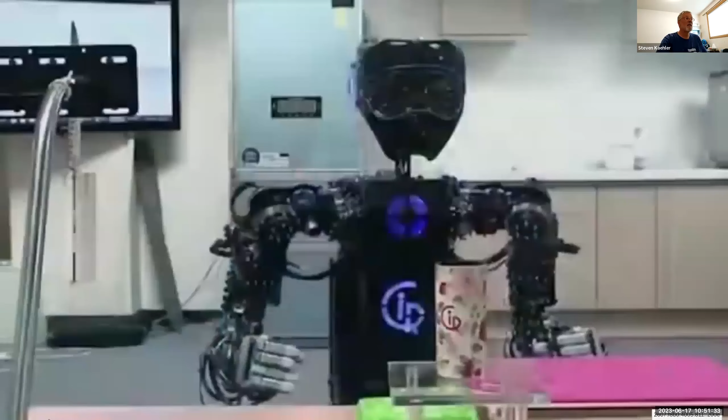Robots are getting pretty sophisticated these days. They can swim, chop, even lift weights, but moving over rough surfaces or unstable terrain still seems to be something most robots cannot do. But it's something animals can do really easily, which is what inspired Daniel Goldman. He's created a robot that, as you can see here, can do what should be impossible.

So, Daniel, how did you get your robot to move so well in the sand? Well, this is a robot we created to act as a physical model of some of the organisms we study - in particular, a long-legged, long-toed little lizard that runs around in the desert southwest of the United States. In this study, we're focused on how we can predict and understand why certain leg shapes work well when the robot tries to move across sand, and how some don't allow it to move well at all.

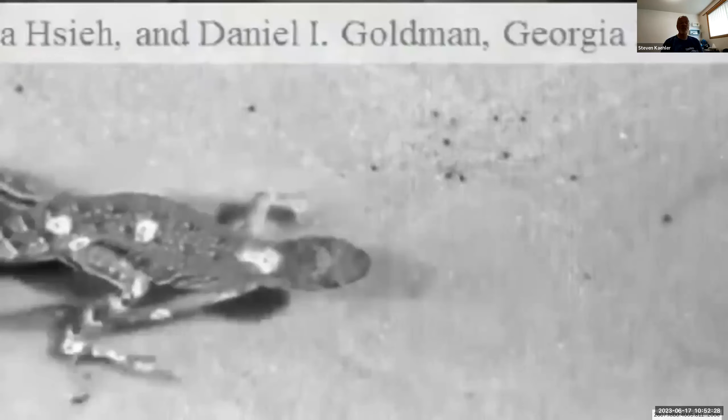I'm looking at your robot's legs, though - they don't look too much like lizard legs. They look sort of like concave C shapes. How did you come up with that shape? Right, we don't necessarily want to mimic the lizard's leg shape. In this study, we're really interested in discovering the principles by which different shaped limbs allow robots to move, and one day try to apply that to the principles that allow animals to move.

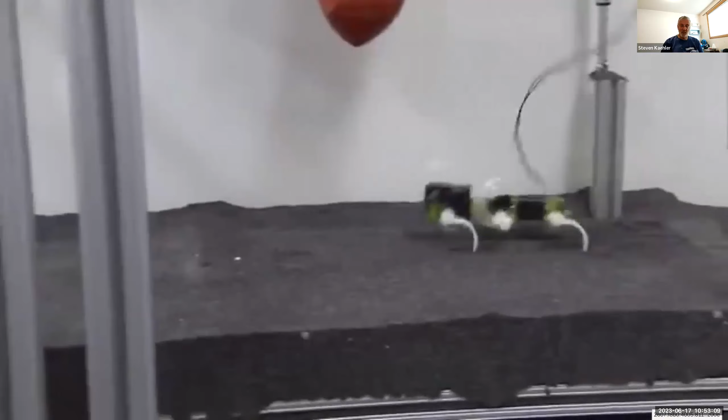So what about your robot is inspired by lizards then? Very little of our robot is inspired by lizards, other than the fact that the robot's legs move in a cyclical manner and interact with a granular material. We think of the robot as a model of any organism, which allows us to get at the principles of limb-ground interaction when that ground is a granular material that can flow and solidify underneath footsteps.

But surely those lizards are better on the sand than I would be. Is there something about the way those lizards compare to other animals that inspired you? Well, in fact, the lizards we have studied are champions of desert locomotion. They can go over hard ground using their long toes, and they can go over very soft sand. So inspired by their performance, we want to understand why the particular limb and feet shape are so good. But to do that, we had to take several steps back to really understand the general principles by which complex shapes interact with ground like granular material.

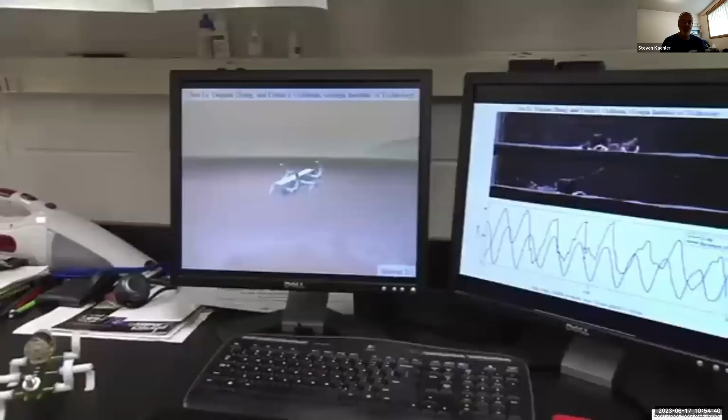So how does your robot compare to, say, a tank with its treads or the Mars rover with its wheels? Is it better? Well, it's hard to say. In terms of numbers of body lengths per second it can move, I'd say it's quite impressive, but at this point it's hard to make a direct comparison. We hope with our new terradynamics, the theory and models that allow us to compute the performance of different devices including wheels and leg devices, we can get some systematic understanding and comparison of these different modes of locomotion.

So Dan, this is a pretty exciting piece of technology, because the whole world isn't paved and other planets aren't paved. How do you see this being applied? Are the next Mars rovers going to have little funny curved legs? Well, you'll have to ask NASA about that, but we think that using our terradynamics, our system to understand forces on arbitrarily shaped intruders, can help designers create effective limbs for different varieties of granular material.

Well, thanks so much for talking to us, Dan. My pleasure. Thank you very much.

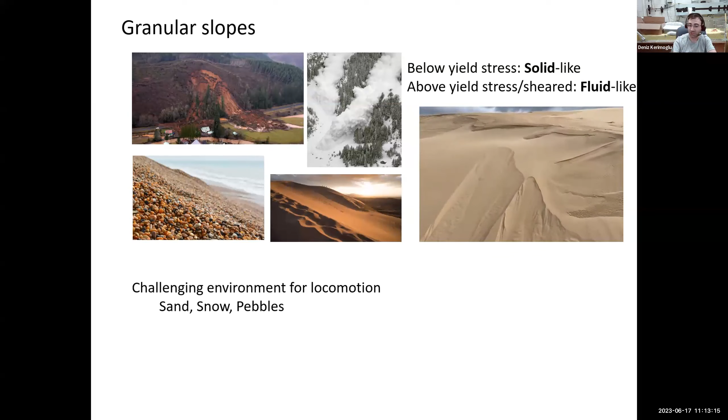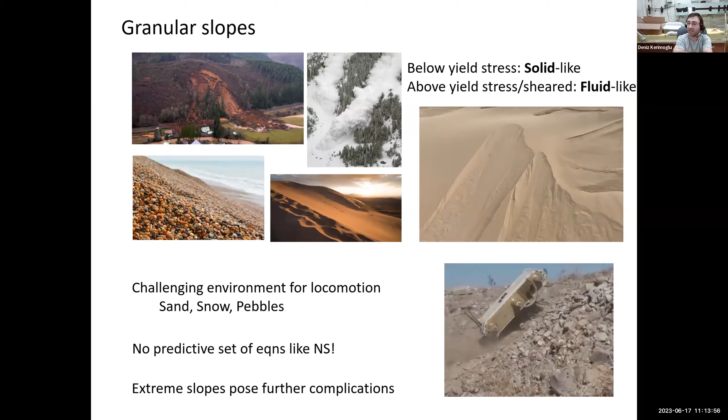It's really due to this multi-phase feature of such media being solid or fluid-like, depending on the force you apply, that it's so challenging to locomote on such media. In addition, especially on extreme slopes like sand dunes, even small disturbances can generate avalanching downhill flow and other complex behavior, which poses further complications. Unfortunately, there is no predictive set of equations like Navier-Stokes for fluids or hard contact models for rigid surfaces, so there's very limited things you can do if you want your robot to conquer this unfriendly landscape.

The approach we are pursuing is called robophysics. I believe there are lots of engineers listening, and this is a bit different from a regular engineering approach, where engineers optimize for a specific goal given a motivation. Here, we actually do not want to optimize for whatever cost function we have. We want our system to fail frequently so that we can learn from the failures a lot.

This approach is called robophysics. You want to understand the interaction physics of the robot limbs and body, and intruding bodies into these complex media, which is granular media. So we systematically span and investigate variables instead of trying to optimize them. As Dan's lab has shown over the years, successful robotic and biological locomotors actually modulate their gait behavior to tap into this multi-phase feature, the solid and fluid-like response in flowable substrates. This means the locomotor is coupled to its environment—they're not independent entities, they're more like a merged entity.

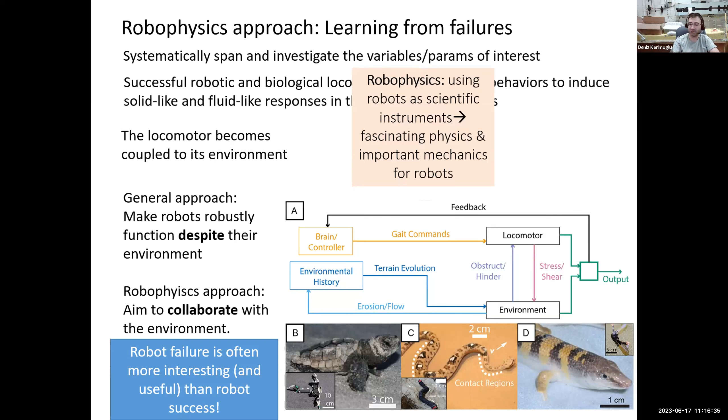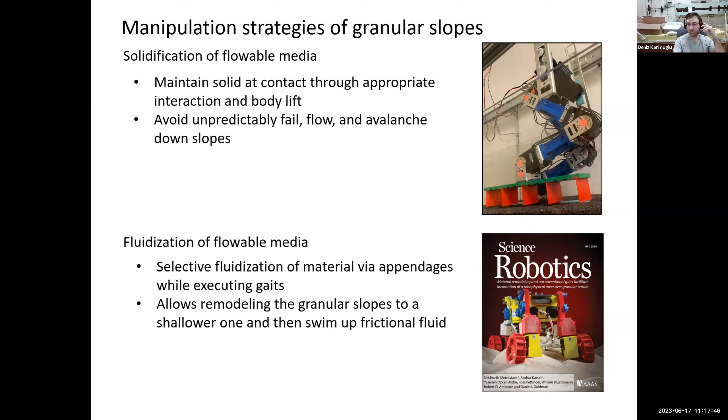I already mentioned two distinct features of granular media, and to tackle that issue, our lab has developed two distinct approaches over the years. First, solidification of such media on slopes—the idea is to maintain solid contact through appropriate interaction and body lift, avoiding avalanching behaviors by engaging with the terrain appropriately. The other approach is to fluidize the flowable media, as you see with this small rover our lab has been working on for about 5-6 years, tapping into the fluidization aspect of the material to create selective fluidization via appendages using unconventional gaits. I was talking about the first approach, but if I have more time, I can also pitch the second approach.

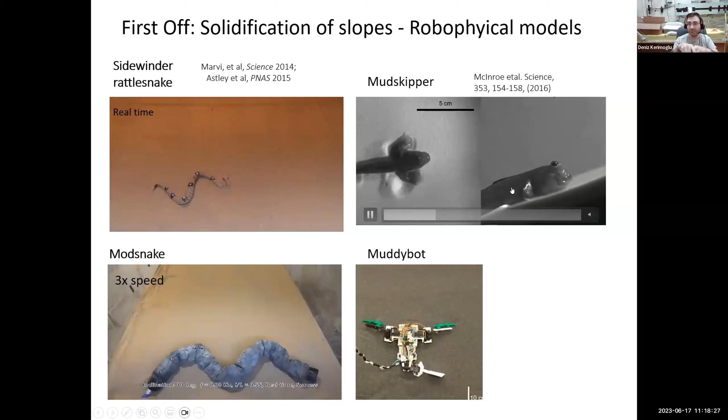Let's start with the solidification of granular slopes. Again, I was talking about a robophysics model—you see a snake-like robot climbing up a granular slope here. Our lab, about a decade ago, developed a similar robophysics model which isn't a perfect robot, but is good enough to mimic the basic fundamental gaits and complexities of an actual snake. By having a large contact area as a function of slope angle, this robot was able to locomote up to about 20 degrees.

Another study was done on this tail guy here, the mudskipper, investigating the effect of fins and their insertion depth, as well as the effect of the tail as it interacted with the granular media as a function of slope angle. The main idea is to try not to make a mess of the ground, so that the response is as solid as it gets—to get the most solid response out of that flowable slope surface.

This is the actual solidification approach. As you see, the sidewinding snake robot increases its contact area when ascending those sandy slopes to stay below the sand's yielding stress.

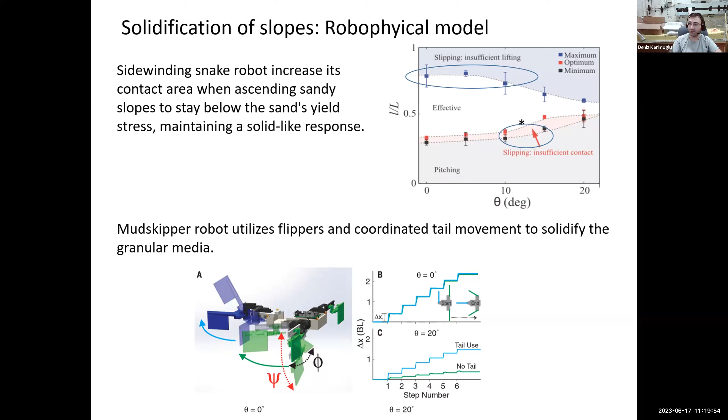So that allows it to generate a more solid-like response. For the mud skipper, it utilizes its flippers and fins and coordinates tail movement to solidify the granular media and then propel its body upwards. So this is all just on the actual solidification process.

However, as I mentioned, these robots were only able to handle about 20 degrees of slope and only uphill, and they have limited limb utilization in that their bodies are in contact with the media most of the time. Even though they're trying to solidify it, they were not actually able to do it very properly. So we were asking this question: can we find a better, alternative way of facilitating limbs for slope solidification to ascend and descend the robot?

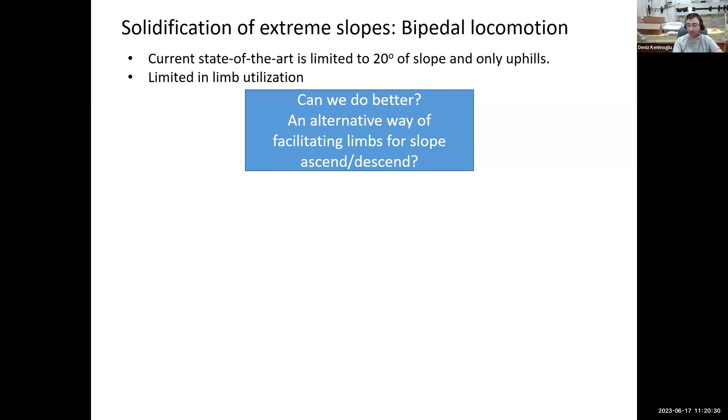So we were after this question, and then we just switched. I inherited a robot which was in the lab before, and it was a bipedal robot. Why a bipedal robot? Basically, the idea is that it's very constrained and can be easily unstable, but it could also be so useful in these very constrained environments where you can do exploration, search and rescue, as well as construction. Since it's also very close to human morphology and anatomy, it's a good platform to work with humans.

Now lately, with Boston Dynamics and a bunch of other researchers, the robots are becoming more and more dynamic while walking. There are a bunch of great studies out there. As a comparison: the static case has stability over speed and agility, whereas the dynamic case has speed and agility, but their stability is not that great.

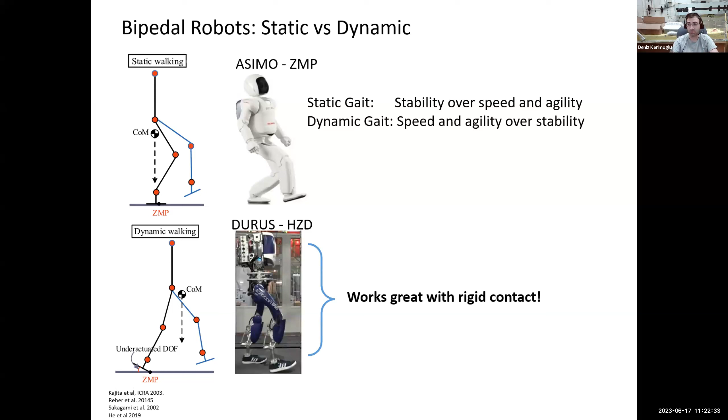So as I told you, dynamic walking is great. However, it's all good with rigid contact, where you know the reaction forces quite well and can predict them under some assumptions. But the issue is that on these flowable slopes, high-speed ground contact with the media leads to instant fluidization of the media. Instead of being more solid, high-speed contact makes them more fluid, and the terrain cannot generate enough response, so sinking, slipping, and tilting is the generic behavior you see if your robot is too fast on such media.

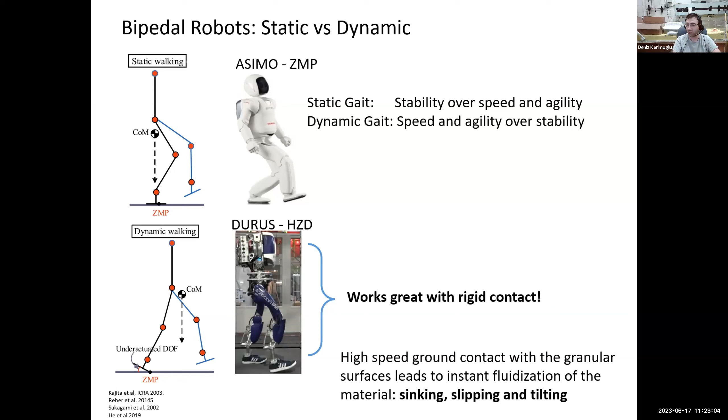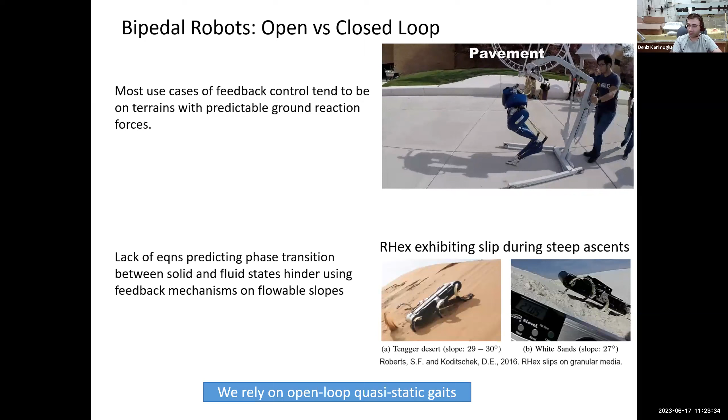Also, most of these robots nowadays have lots of sensors embedded and just use feedback control methods. However, again, the assumption is that the ground reaction forces are predictable to a certain degree. Since the equations are lacking, or very rudimentary, in such environments, the phase transition between solid and fluid actually hinders using feedback mechanisms on flowable slopes.

So based on this brief literature review, we rely on open loop gaits and quasi-static gaits to make the robot walk on these extreme granular slopes. These are the basic reasons.

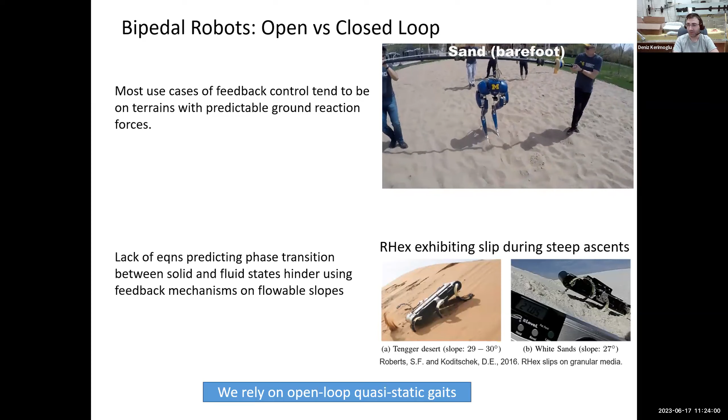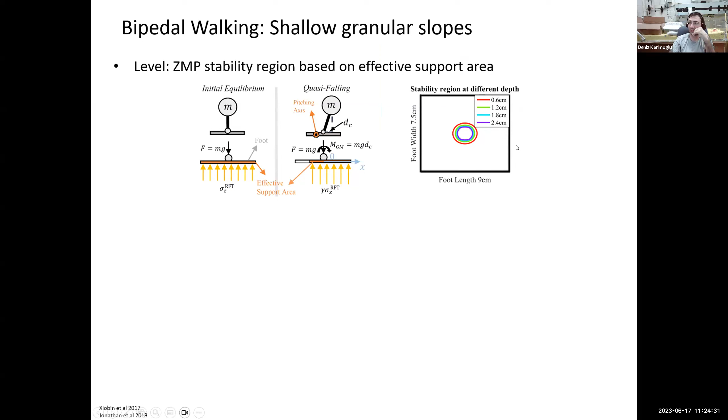Previously, our lab members worked on various ways to understand what happens on granular media. For example, if you're on a rigid surface with a foot of this rectangular dimension, the ground reaction force is effective all around this rectangle. However, when you switch to granular media, even on a level surface without any slope at all, you have a very limited range of stability.

And what we do is we just connect those servos using 3D printed links.

And we use poppy seeds basically to model these sand-like surfaces, because it's a good analog to model those sandy particles. We cannot directly use sand particles, because once they get into your actuator, it just blows your actuator. But these poppy seeds, if they end up in your actuator, they basically grind up to oil. Basically, they don't harm your actuator. This is the basic reason we use poppy seeds in our lab.

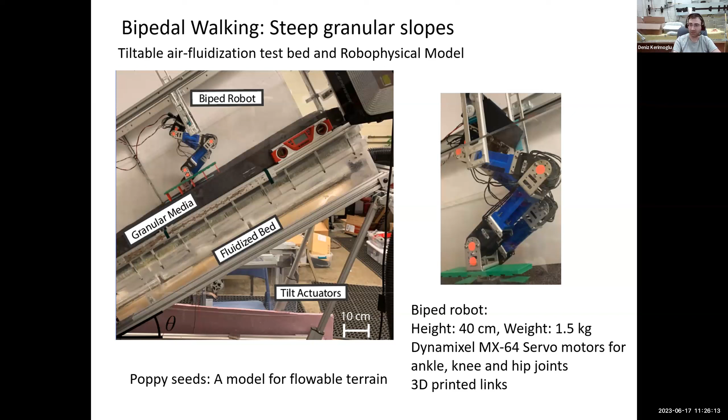And we just put this robot on a fluidized testbed to do parameter sweeps, basically, which is a robophysical approach that I was talking about.

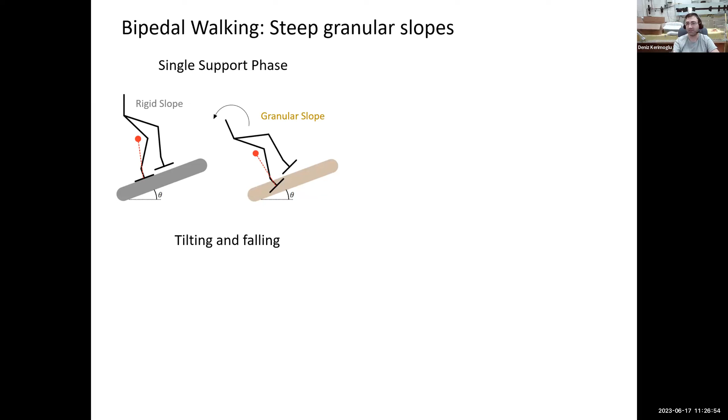A bit of an issue that I had while trying to learn using that robophysical approach was this: the center of mass, on a rigid slope, you can predict that, give or take, for a single step. But on a granular slope, since you kind of yield unpredictably, it's really tricky to determine your center of mass position, especially as the slope gets to extreme levels. It's almost impossible to determine the center of mass, so you cannot really design a gait, because you just tilt all the time continuously.

The next issue is, even if you can assume and generate a step on a rigid surface, that's okay. But on a granular surface, if you cannot determine your center of mass properly, you shove your foot into the granular media, and that generates a lot of reaction forces, which again leads to tilting and falling behavior.

So then I designed a gait structure which actually allowed me to keep the center of mass regardless of the terrain slope, right at the vertical projection of the ankle, so that regardless of the slope I'm walking on, I'm not tilting forward or backward. No matter what I do, I use the zero moment point - I alternate the zero moment point such that I don't even tilt a degree at all. And then after I place my foot successfully, I can then propel my body at the double support phase. Because I now have 2 contacts, I become even more stable.

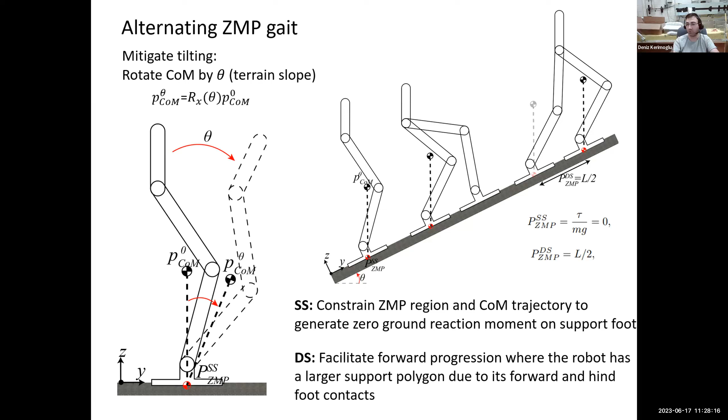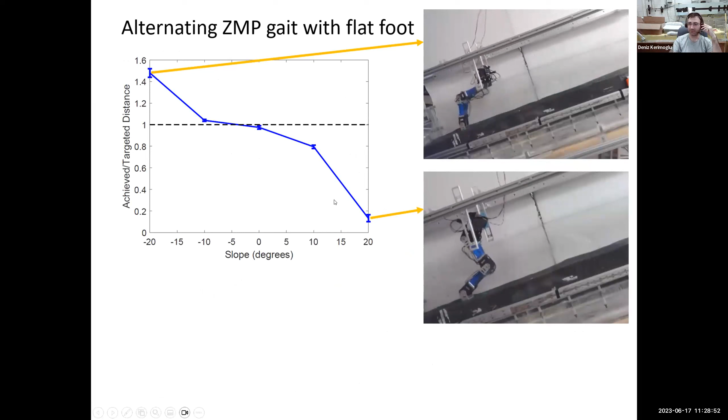But no matter what I do with this kind of gait that I developed, I keep slipping down all the time because of gravity. The friction between the 3D printed flat foot and the granular media, basically poppy seeds, allows you to stay straight up to 20 degrees. Other than that, no matter what you do, for steeper slopes, you just slide down. So that was an issue.

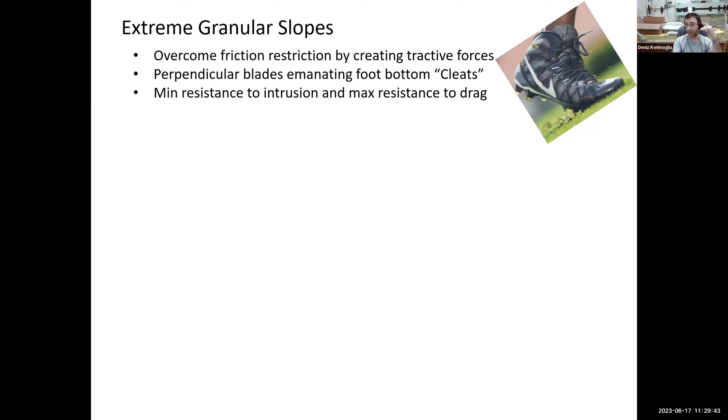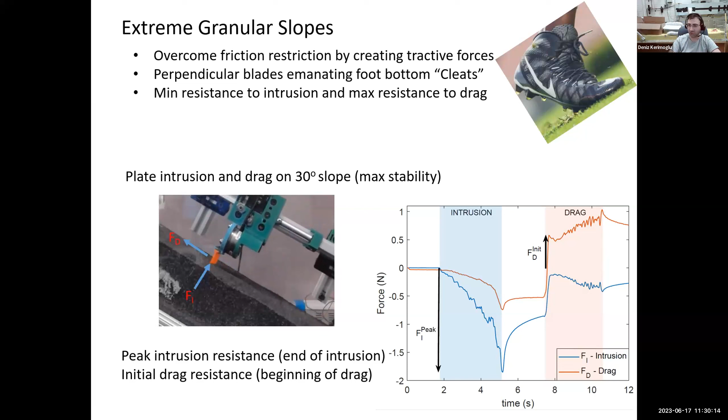So then turning back to soccer, if you remember these cleats for soccer shoes, we are actually inspired by these sharp objects or sharp structures that engage with the terrain while walking. We were asking the question: can we use similar structures to engage with the media so that we don't just slide down? So we first took a bunch of plates and inserted them into the granular media and measured the reaction forces, first intrusion resistance, as well as drag, at a very extreme slope of 30 degrees. And then we analyzed this data by changing the spacing between these plates. There is a specific design of these sharp cleats, sharp plates for soccer shoes. We wanted to understand what is a good spacing for our robots that will allow us to climb in a better way. That was the primary question we had.

So we can skip this one. We just 3D printed a bunch of plates with different spacing, starting with a single plate with 0 spacing, and then 1, 2, 3, 4, until 5 centimeters spaced plates, and then we intruded and dragged them. So to sum up: if I can generate lots of traction force, lots of drag force, with less intrusion resistance, I can place my plates properly without creating a mess, just solidifying each footstep during foot contact, so that I don't yield.

The robot actually does not slide down, that was the basic idea. We found that after approximately 4 or 5 centimeters of space between plates, we were able to create really good cleats, if you will. So we just placed them - this is a 4 centimeter apart spaced cleats, as you see.

Now, not only can I walk better on slopes from -20 to +20, I can now even walk at very extreme slopes, like 30 degrees. And the performance is not that bad - I fail like 40%, but I can make my way 60% for these kind of extreme terrains.

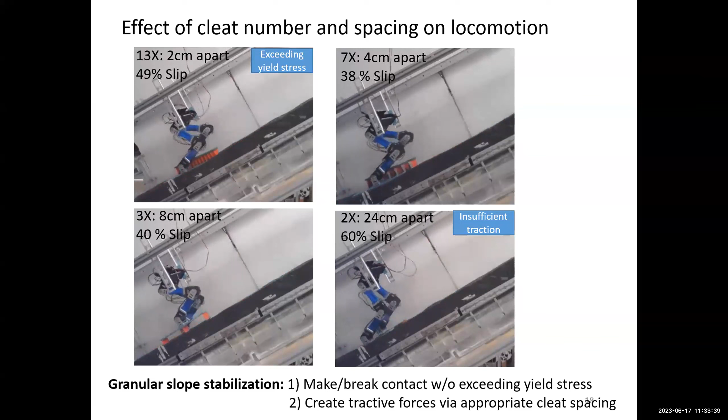I was wondering if you had tried curved plates. I did try various shapes, I would say, but the easiest one in terms of understanding it was these kind of rectangular straight plates. If you also have curved plates, they also tend to bend, right, and we don't know how bending is affecting things. So it's a good question, but we didn't try it. We would love to, but it's not straightforward, because now you have to get into material selection and material properties. With these straight ones, we don't really care much, because they don't bend a lot and stay straight. With this kind of design we can easily sweep the parameters. But I think it holds real merit for future endeavors.

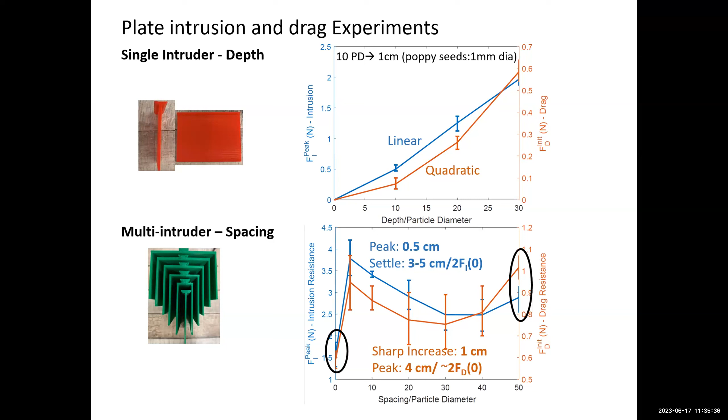Did you also try varying the depth, that is the length of each little plate? I did try to vary the depth. What happens is - I didn't show it here - but it is good that you go as deep as you can, because even on shallow levels you can still create tractive forces, but the tractive forces you can get as a function of depth is actually a quadratic function, which means you can get exponential forces if you go deeper. So going deep is good, as long as you do not create lots of force while actually going deep. You're basically going as deep as the height of your gait. Yeah, I actually modified the gait so that it pushes them at a specific rate and a specific distance - depth, yeah.

I have more slides, but I think I should stop here because we also have Baxi and Tianyu to present their great robots.

And there's another question in the chat there, Dennis. Do you have the chat window open? Now I'm looking at it. I think Scott just asked a question - did you try doing any of this in simulation? If not, why not? That's a good question.

I did try. First off, granular media simulation is nothing easy. Especially on slopes, you have to use brute force methods to simulate granular media on flowable, extreme slopes - modeling them one by one, each particle on a particle basis. You need millions and millions of particles, because these are like 1 millimeter diameter particles, and you need to use DEM, discrete element methods approach. I did do simulations on intruding plates, but not the whole robot. That's going to be a whole new avenue, but it's a good question.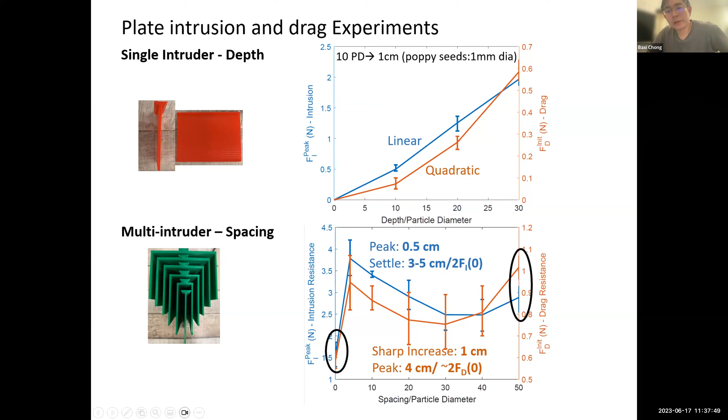Because if not, you have some more. Your colleague going to present on something a little different? Yeah, I think we have Baxi. Baxi, why don't you go ahead? Sure, Tianyu wants to present first, and I can go next, and Baxi will go after me.

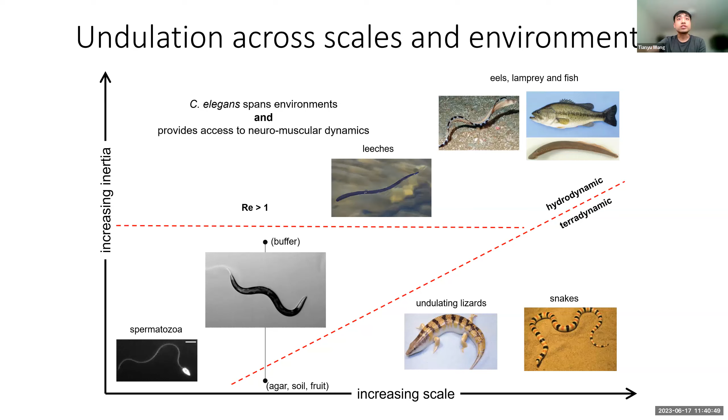Before I jump into our results of observing the kinematics of this worm, here's what we're going to do. Here you can see a video clip of locomotion, and from this video we're going to first calculate the body curvature at each time step, giving us a curvature heat map like this—you can see a clear stripe pattern, which means the worm is performing traveling wave locomotion. Then we project these body curvatures onto basic sine and cosine principal components, which we sometimes call shape basis.

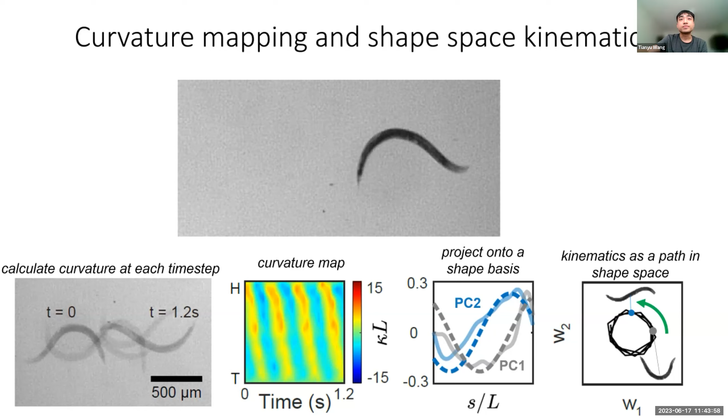Now I'm going to introduce a bit on worm swimming performance in open fluid versus lattice kinematics. We studied the body kinematics of C. elegans in lattices with very different densities. Let's first look at the very first row, which shows the kinematics of a worm in open fluid.

This worm can go forward and it displays a very clear diagonally projected stripe shape in body kinematics. You can also see a circular shape in the shape space, so this worm performs a very clear traveling wave in this open fluid area. If we move to the second and third rows, we start to have posts in the environment.

Surprisingly, these worms still perform a very interesting, similar locomotion pattern in these environments—they still maintain the traveling wave form. But other than that, if you can see my cursor, in the third row, in this dense lattice, you're going to see these traveling wave patterns actually start to break down. We'll show later why such a pattern could happen.

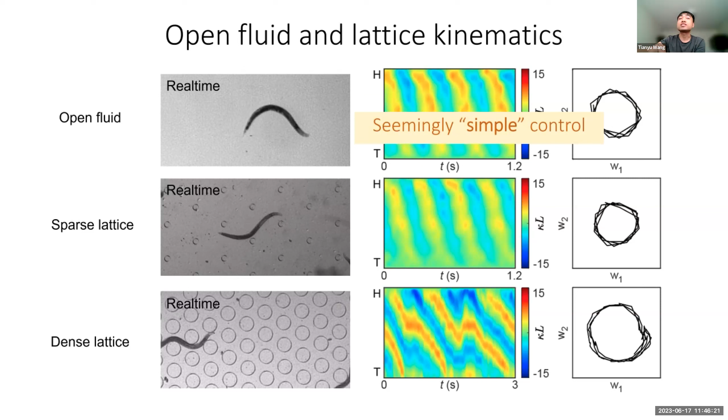With this finding, we can say they have seemingly simple controls. And with this observation, we start to hypothesize that there should be a lot of passive mechanics and passive body-environment interactions, which we call mechanical intelligence, that actually plays a very important role in C. elegans locomotion when dealing with such obstacles.

We suppose this kind of mechanical intelligence plays a good amount of role in such limbless locomotion in such obstacle-rich areas. So where does such mechanical intelligence come from?

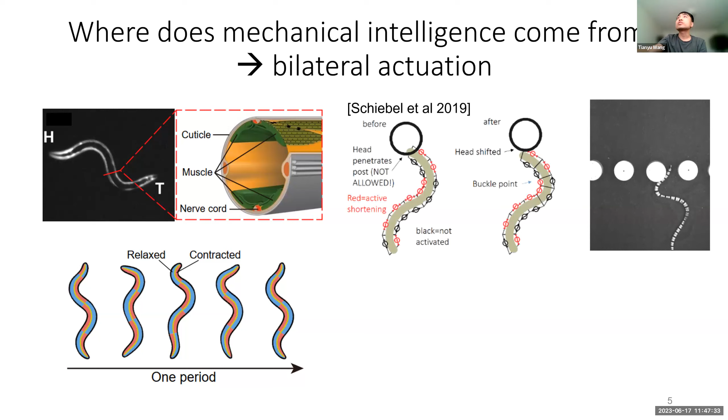If we further look into the C. elegans anatomy and see how they produce undulation, as shown in this figure, they're actually contracting and relaxing muscles on either side of the body to produce locomotion. The red area shows the contraction of the muscles, and the blue area shows relaxation of the muscles.

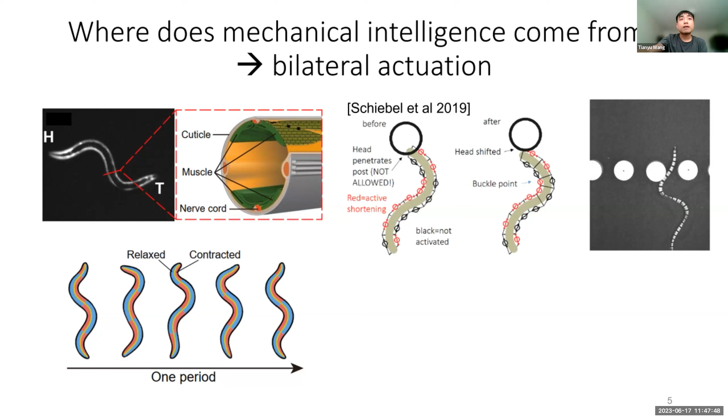Very interestingly, some previous work from our group shows that there is a very similar bilateral actuation mechanism in snakes as well, and this actuation mechanism helps snakes get around such obstacles. So our research problems start to emerge: how to test such bilateral actuation, and how can we systematically study the effect of mechanical intelligence in limbless locomotion.

Then we start to look into robots, because we want to test such mechanisms on the robot, since these animals don't allow you to really control their muscles or do whatever experiment you want to try. So a robot is very naturally a good model for us to test such mechanisms we want to learn.

This is the state of the art of limbless robots in the area, and a common point of them is they're all kinds of serially linked limbless robots. By serially linked, I mean they have servo motors or rotary motors in each joint of the link, so that you can program what the joint angle could be, and define what kind of shape this robot could take on. Many previous works have defined a lot of closed loop controls and sensing, so they can get information from the environment and use that information to plan the body shapes so they can locomote in such environments.

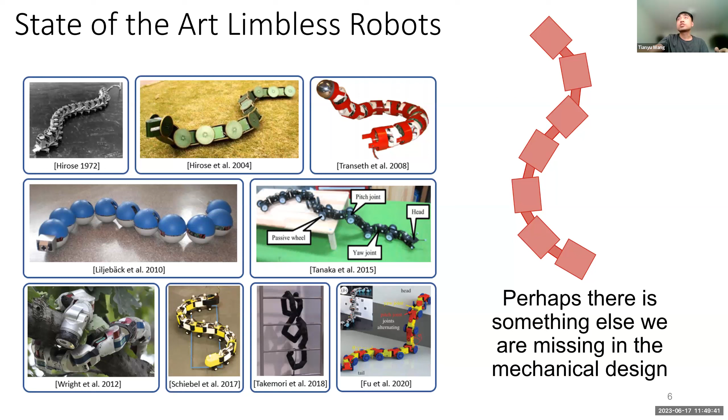However, we're thinking there is something else we're missing in such mechanical design, because you can see from my previous slide that limbless animals usually use muscles to control their locomotion, but currently these robots are not.

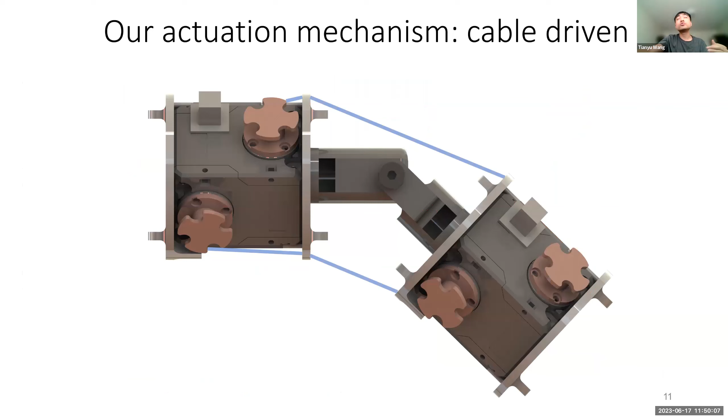So what we're going to do next is, instead of this serially linked body actuation mechanism, we abandon such a mechanism and develop a mechanism called cable driven. We start to drive the joint using two cables instead of one servo motor at the joint, and we arrived at such a new class of limbless robot.

This limbless robot controls and joins its joints using cables that lie around each joint. This is actually a mixture of hard and soft components, and this robot is decentralized controlled, with each cable independently controlled. This robot allows us to implement programmable body compliance, which we're going to introduce later.

More specifically, we're going to use this robot as a robophysical model, so that we can test if this open loop model can reproduce the kinematics we just saw in the similar environment compared to the worms, to test if such mechanical intelligence really has its role in the locomotion.

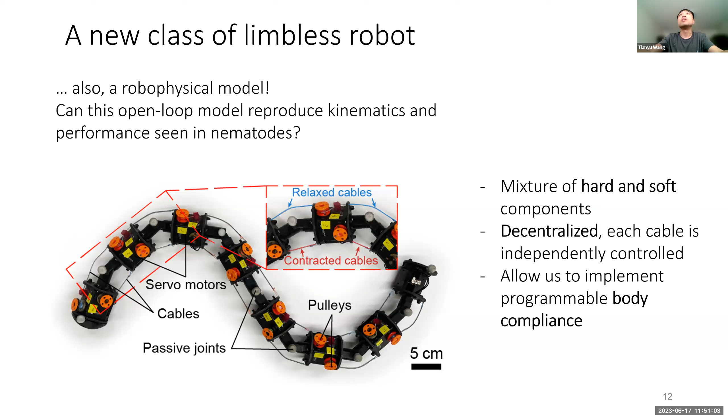So I'm going to talk a little bit about how we control this robot. Basically, if you want to program one of the joints of this robot to a specific joint angle, you're going to actuate the length of the cables to make it rotate.

And if you program this robot with a so-called serpenoid curve, which is basically a traveling wave in the body, this robot can actually start to show undulatory locomotion in terrestrial environments.

One thing I'll mention before I go on is that all environments we consider in this study are so-called highly damped environments, where friction is much larger than inertia. So we don't actually consider inertial effects in such limbless locomotion.

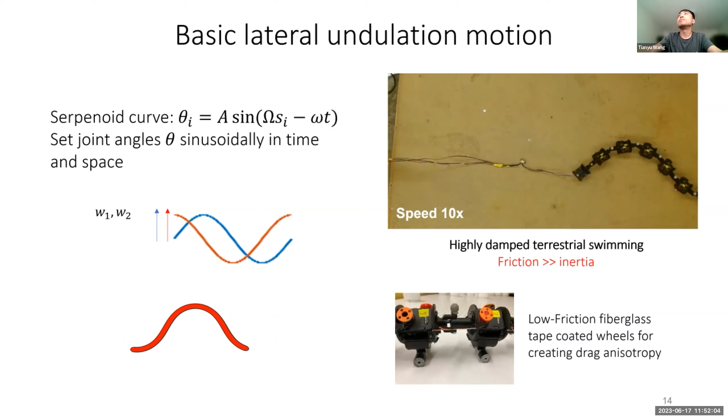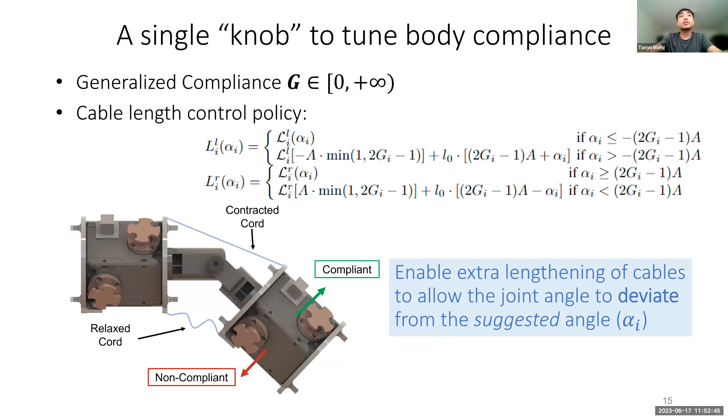I'm going to show some examples here. So when your generalized compliance value G equals 0, this robot is stiff, so it's difficult to bend in either direction of the joint. And if you start to increase G, at the specific point G equals 0.5...

you're going to see that this robot is directionally compliant, meaning you can easily bend this robot body from one specific direction, but you cannot bend it away from that direction. If you increase this G value much more, this robot becomes more compliant in both directions, which we call bidirectionally compliant — very easy to bend in either direction. So G is basically a quantity to define how compliant a robot body could be.

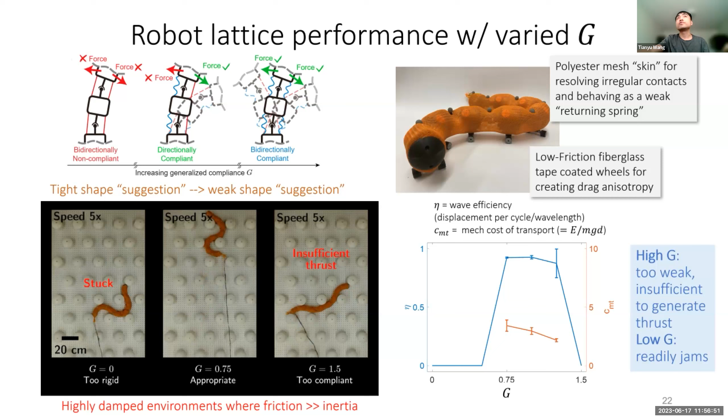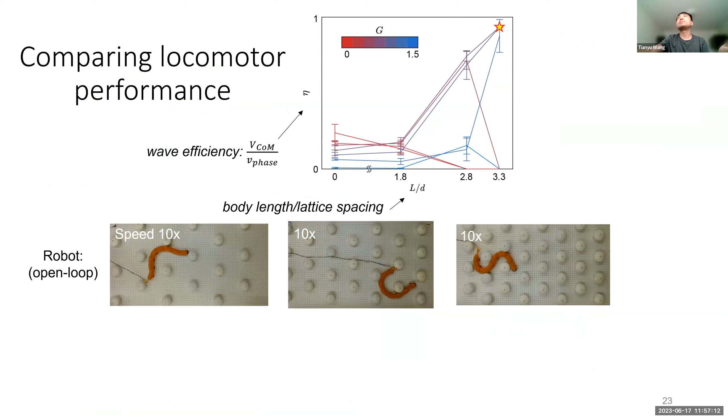If we collected all such performance of the robot in this figure, you're going to see that when your G value is basically in the middle level of this body compliance range, you're going to behave the most effectively in such environment.

And if you compare with the worm locomotion, you're going to see they actually share very similar kinematics and performance specs in such environments. I'm going to show more detailed kinematics later, but here I just want you to see how similar the robot behaves.

With the worm's locomotion, in this figure you're going to see how good a robophysical model with G equals 0.75 can actually model C. elegans locomotion. This shows that mechanical intelligence plays a role in C. elegans locomotion in heterogeneous environments without the need of actively controlled tuning.

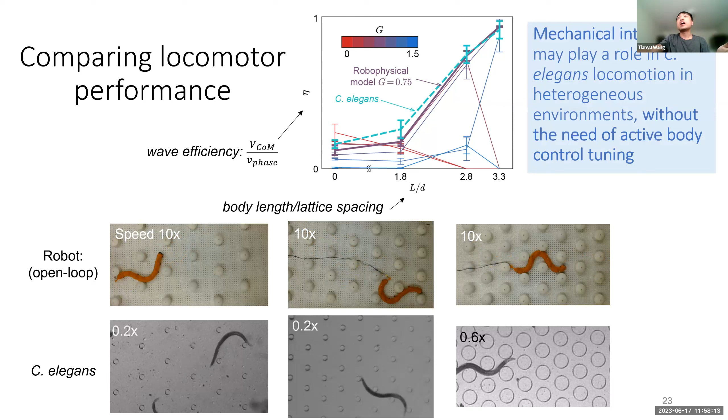All the results I showed here, the robot is actually having open loop controls. And then I'm going to show a little bit of robot kinematics, but I'm going to skip some details. You're going to see here the robot kinematics looks really similar to the kinematics of C. elegans we just showed.

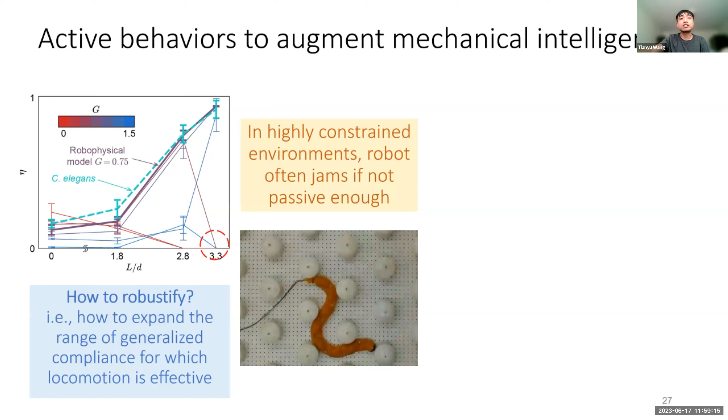So if you look back to nematodes, why do these nematodes never get stuck in such environments? It's very complex for them as well, and they have no prior knowledge of this lattice before they start to swim in such environment.

So we're finding that these worms are able to do some active reversals. During these reversals, they play the wave backwards a little bit for half cycles, and then they start to repropagate.

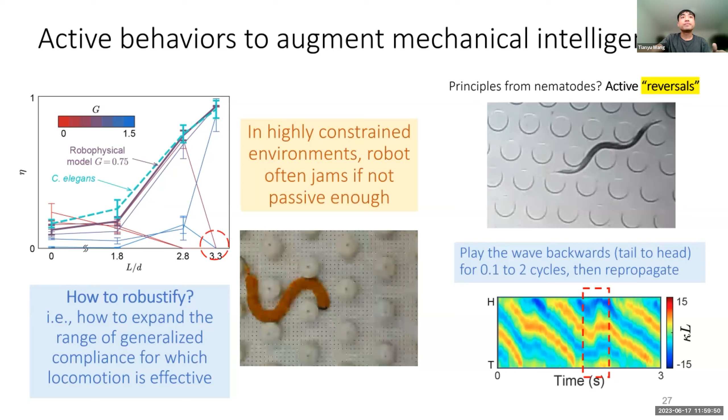That's why you see this traveling wave get broken a little bit, and then they start to propagate again. So we looked into the literature and found nematodes actually have this tap contact sensing in their neural system. We thought, how about we implement a similar mechanism in the robot so that the robot can detect force contact, so that we can trigger such reversal behavior in the robot as well.

I'm going to skip a little bit of detail of how I implemented this. I'm going to show this demo here.

When you implement this robot with this head sensor, the robot starts to have this reversal behavior. It can start to get stuck very frequently, and then it can start to play backwards locomotion, and then it gets through this lattice without problem.

And here's a comparison of active reversal behavior in robots and the worm. You're going to see they also display very similar kinematics as well.

Here's a comparison between open loop robot without reversals and closed loop robot with reversals. You can see that before, for many different G values, this robot cannot work. But later on, you can see for those G values, especially small G values where previously the robot couldn't work, with this closed loop control, the robot starts to traverse such lattices with the help of such reversal mechanism.

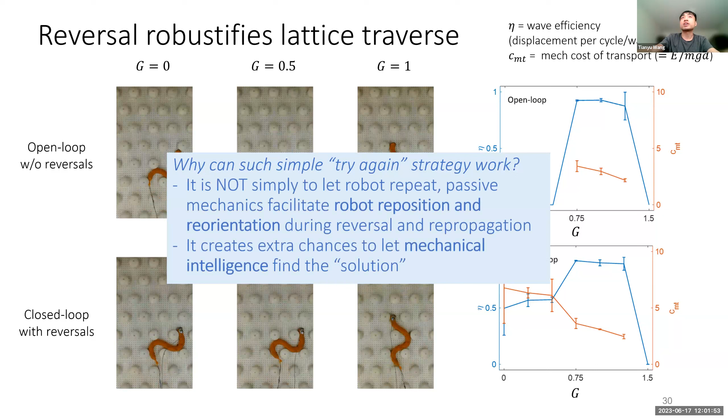So further discussion of this reversal behavior: why could such a simple try-again strategy work? We argue that it's not simply letting the robot repeat, it's actually letting the robot's passive mechanics facilitate robot repositioning and reorientation during the reversal and repropagation. This behavior creates extra chances to let the mechanical intelligence find a solution to this environment.

All right, so here comes my conclusion.

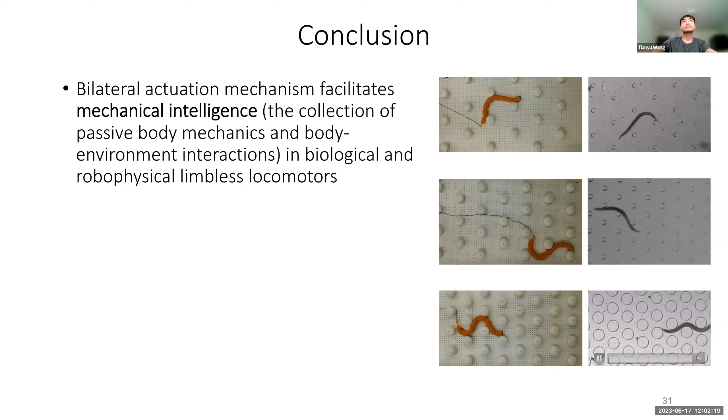The several takeaways of my talk will be: first, the bilateral actuation mechanism actually facilitates mechanical intelligence, so-called, in biological and robophysical limbless locomotors. Such mechanical intelligence plays a very important role in limbless locomotion, simplifying active controls for effective locomotion in heterogeneous environments.

Furthermore, based on the mechanical intelligence, we can develop a simple active behavior, which is reversal, so that with limited feedback sensing information and calculations, we can enhance the mechanical intelligence so that the robot's navigation capability gets robustified.

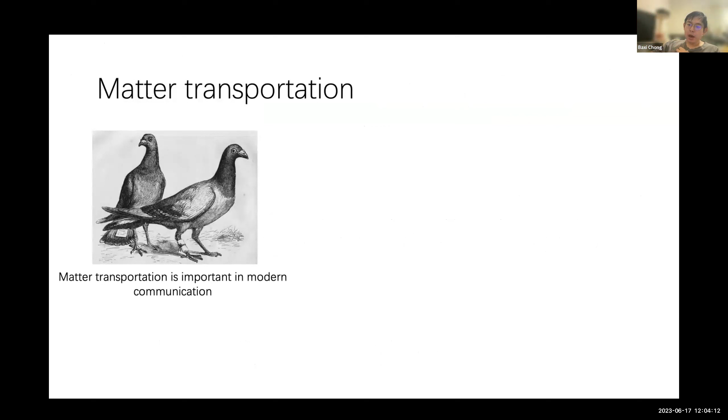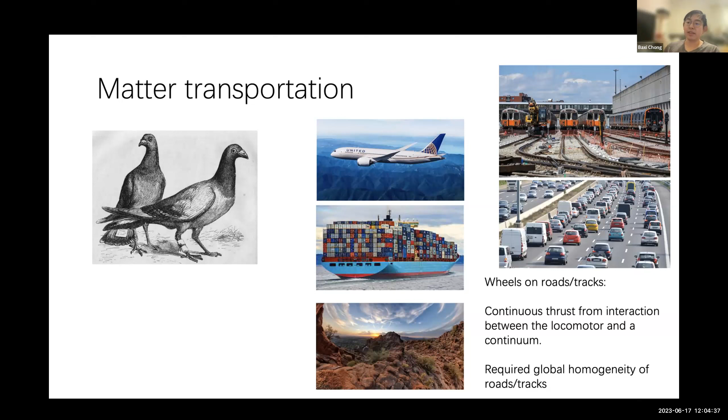Matter transport is important in modern communication. However, most terrestrial matter transport relies heavily on roads and tracks. For wheeled locomotors like trains and cars, it relies on continuous thrust from the interaction between the locomotor and the continuum, requiring the global homogeneity of roads and tracks. Any disturbances on those roads and tracks will significantly delay the matter transport.

So that's the first way we think of matter transport: we have homogeneous landscapes and noisy landscapes, and the noisy ones can cause delays. That's our first way of thinking about matter transport. Then we look at legged locomotion.

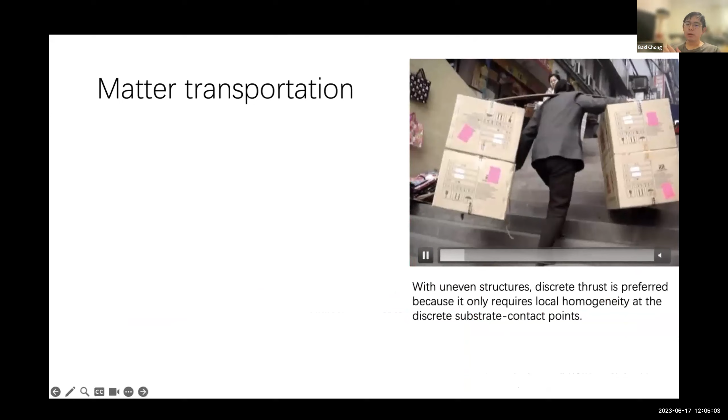This is what we call the bangbang man from my hometown. On uneven structures, discrete thrust is preferred because it only requires local homogeneity at the discrete leg-substrate contact. But the question is that it would require vision.

For humans to work on uneven terrain, we need vision, peripheral sight, sensors, and environmental awareness to see the environment and make the next move. That's the real-time feedback. So the bottom line is we need environmental awareness for legged locomotion to facilitate effective matter transport.

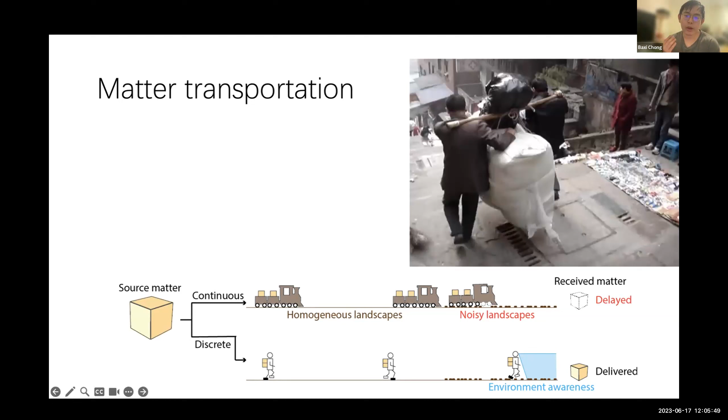We are inspired by hexapod-like RHex robots. Because of their additional legs, we don't have to worry too much about stability. We wondered if having more legs can be sufficient to reliably go from A to B. However, those additional legs for the hexapod are only sufficient to counter certain loss of stability.

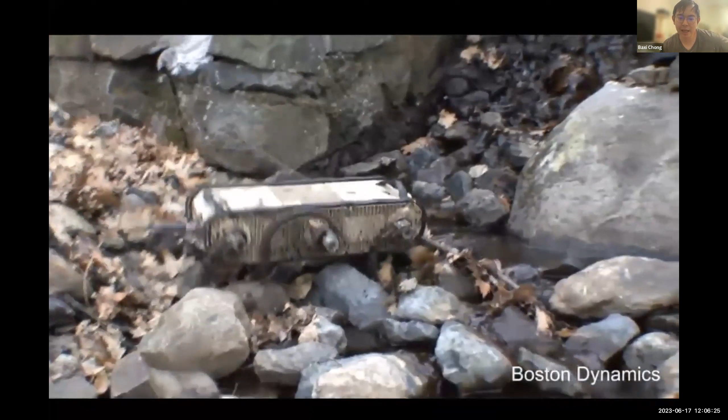When the situation is like this, you see that thrust deficiency from non-perfect contact can cause indefiniteness in arrival time. That means if you wish to send a hexapod from A to B, eventually it will get there, but the arrival time is indefinite - we cannot quantitatively predict the accurate arrival time for the hexapod to go from A to B.

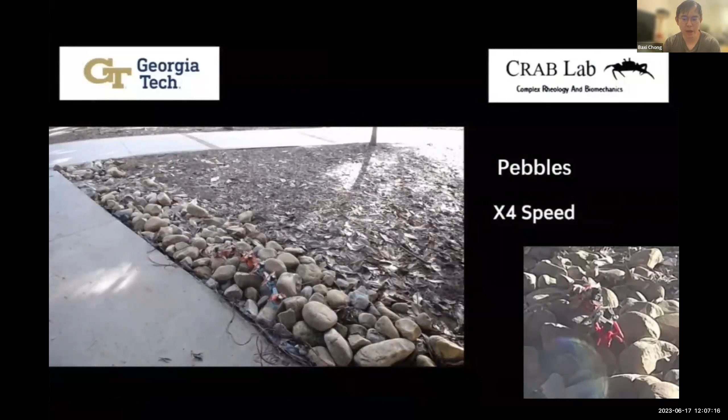Based on those observations, we wished to see what happens if we have more legs. Here's a centipede robot, and we deploy the open loop operation of the centipede on pebbles where the height variation is twice the size of this centipede robot. It seems to be very effective and can conquer highly heterogeneous environments, which in our control example, the hexapod cannot.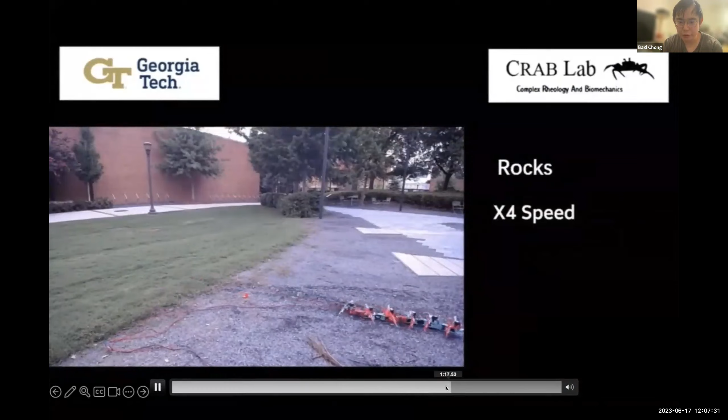We'll also see it can go through grasses, and here are rocks outside of Georgia Tech. We also have some indoor experiments.

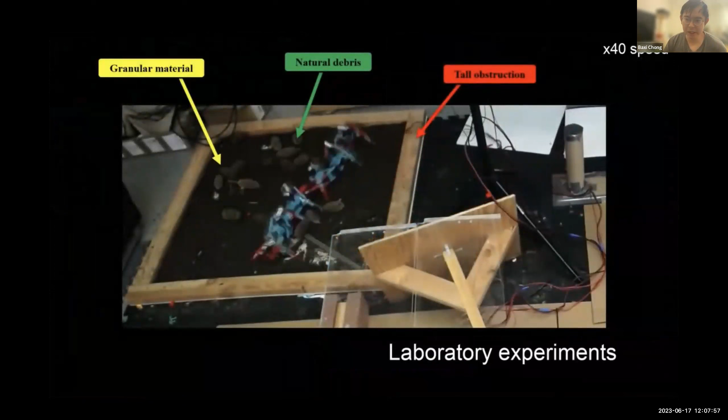Here's a wall, obstacles, and a slope with bricks, and the robot can make a turn to deviate. Then there's packs it can go through, stepping into obstacles like natural debris, then making a turn to overcome granular media. All these controls are open loop, highlighting the potential of just using redundancy in the number of legs to counter terrain heterogeneities.

This idea is quite similar to signal transmission in Shannon's information theory. So how do we transmit signals over noisy channels? Here's a brief overview, referencing Shannon's famous paper on the mathematical theory of communication. There are many ways to do this.

The first thing is we have an analog signal. In principle, a continuous analog signal can carry an infinite amount of information, but it can be easily contaminated by channel noise. As you can see, here's the perfect analog signal and the contaminated signal - it can be easily contaminated.

So Shannon suggests two things. Firstly, he proposed to digitize the signal into discretized bits. Having those bits limits the maximum amount of information that can be carried per bit, but such limited discretized bits can guarantee some reliability and robustness, which he illustrated can be achieved through redundancy.

Here's an example of simple repetition. Through this simple repetition and digitalized signal transmission, we can reliably transmit a signal from A to B with the error rate arbitrarily close to zero. That's unidirectional signal transmission.

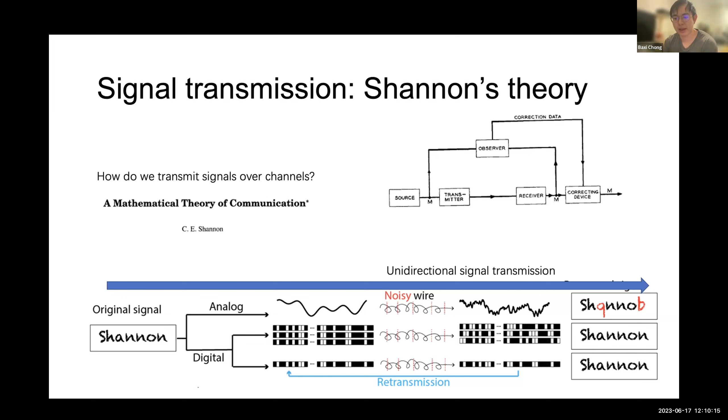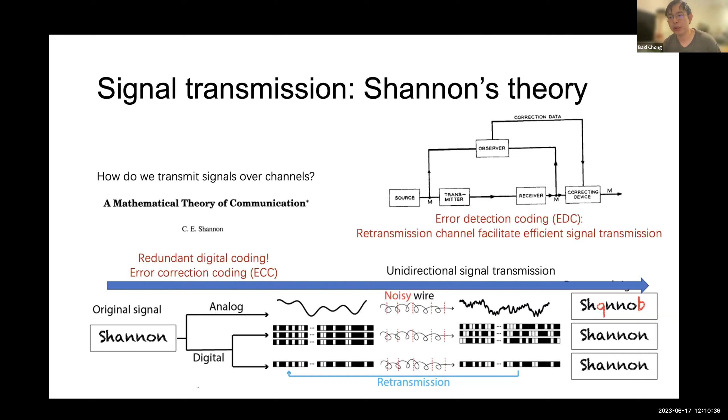So what we learn is that we have redundancy, we have different codings for information theory, all those frameworks developed. Now we wish to transfer the knowledge, the insight from signal transmission into locomotion, into matter transport. How can we guarantee matter transportation from A to B relies just on redundancy and not on channel homogeneity and environmental awareness? So we wish to say that the middle panel is also a reliable alternative for effective locomotion and matter transport.

So here's our modeling. Consider the thrust generation of a leg. If we put a robot on the ground, it can generate thrust by pushing the substrate, either on enough Coulomb friction on flat ground or on granular media. So it can generate thrust. We can calculate the nominal, undisturbed thrust generated by this robot-substrate interaction. That's the nominal thrust.

Then we consider the terrain disturbance. So we introduced a random variable of stochasticity in terms of the terrain-disturbed thrust. Having that thrust, we can calculate how much thrust we can generate, considering all the terrain heterogeneity that we can encounter. That's the modeling for thrust generation.

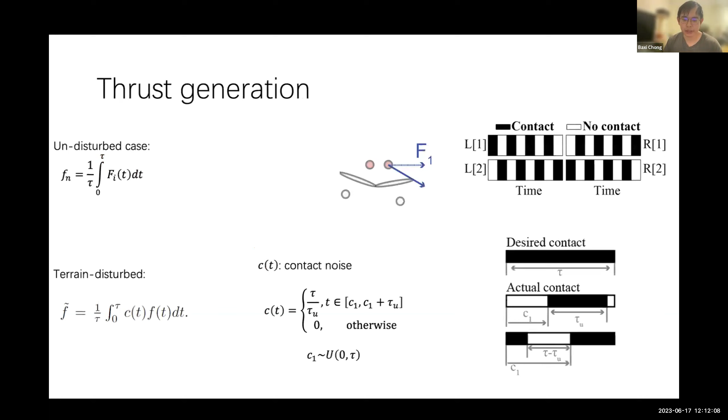Then, the thrust generation is a more abstract concept, and our recent work shows that there is an effective viscous drag in multi-leg systems, where the velocity can be reasonably approximated by a linear function of the generated thrust. In this way, we can convert from the more abstract thrust generation to velocity predictions, and predict how the effective velocity would vary in different systems.

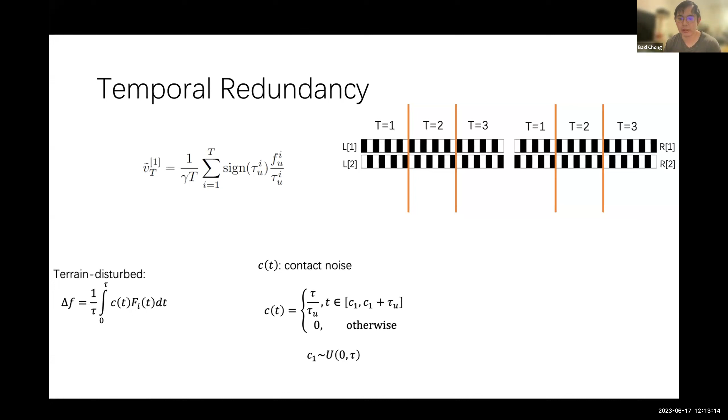In terms of redundancy, the first intuitive thought is to have trial and error, the temporal redundancy, just like Shannon did in his information theory. We reduce the transportation rate. If we fail in the first trial, we try again. If we fail again, we try again. So that's trial and error, temporal redundancy. Here's the formula for what would happen if we have temporal redundancy — we try it again and again.

The second type of redundancy is more elegant — what we call spatial redundancy. That is, we redistribute the temporal steps into spatial steps. We connect, for example, two hexapods to form a 12-leg robot, and we have redundancy distributed in terms of the leg numbers.

So the advantage of spatial redundancy is that gravity will do the job for us. If we experience disturbance on individual legs, the contact loss or terrain noise is no longer acting on a single leg — it's now acting on the entire robot. So the entire robot acts as a filter for the locomotion system.

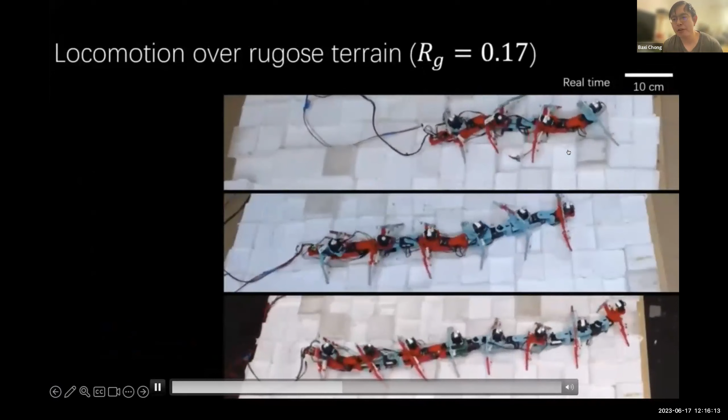The advantage emerges when the terrain becomes more challenging. Here's an example with 4 pairs of legs, 6 pairs of legs, and 8 pairs of legs. The 4 pairs of legs, when they're lucky, can go really fast in the beginning, but they can easily get stuck due to contact losses. You can see the lower bar is almost the same, but if we're unlucky, these 3-legged configurations can take up to 15 periods to travel 60 centimeters.

This phenomenon is further illustrated when we move the robot on more challenging terrains - we'll show this later and wait until the first one finishes its motion task. On even more challenging terrain, this phenomenon is amplified, and you can see the time required for a many-legged robot to travel some distance is more guaranteed - the variance is reduced. The lower bar is almost the same, but the upper bar is significantly reduced if we compare 8 pairs of legs to 3 pairs of legs.

That shows the advantage of having more legs - we can guarantee reliable locomotion just by using redundancy, without relying on sensors or the complexity of active control. It's just open loop, so the complexity transfers from dealing with the information flow of the terrain. We need to react and reflex through designing the coordination and gait design. That's the key message of our current research.